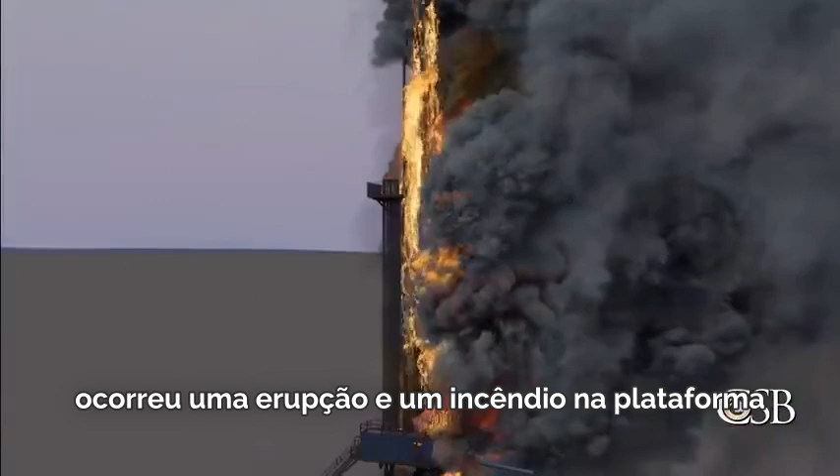In order to change a drill bit, crew members removed the drill pipe from the well. Approximately 3.5 hours later, a blowout and rig fire occurred, killing 5 workers.

Industry best practices recommend having 2 protective barriers in place at all times during drilling operations. But our investigation into the incident at the Pryor Trust well found that both of those barriers failed. The safety management system utilized at the well was simply not effective, and the result was a catastrophic blowout and fire.

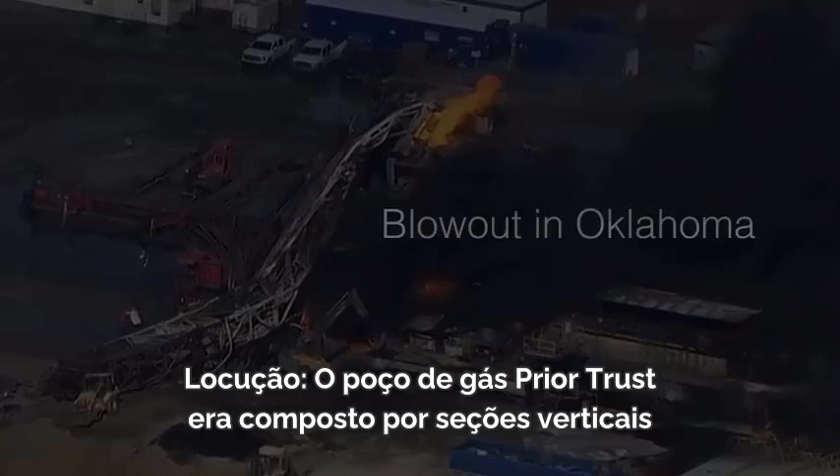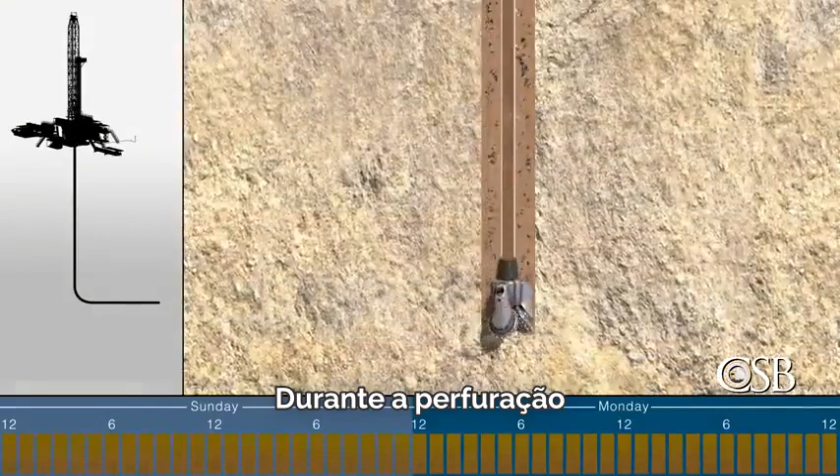The Pryor Trust gas well was comprised of vertical and horizontal sections being drilled to reach underground natural gas in the Woodford geological formation. During drilling, a diesel oil-based liquid called mud is pumped down through the drill pipe and back up through the area of the well outside of the drill pipe, called the annulus.

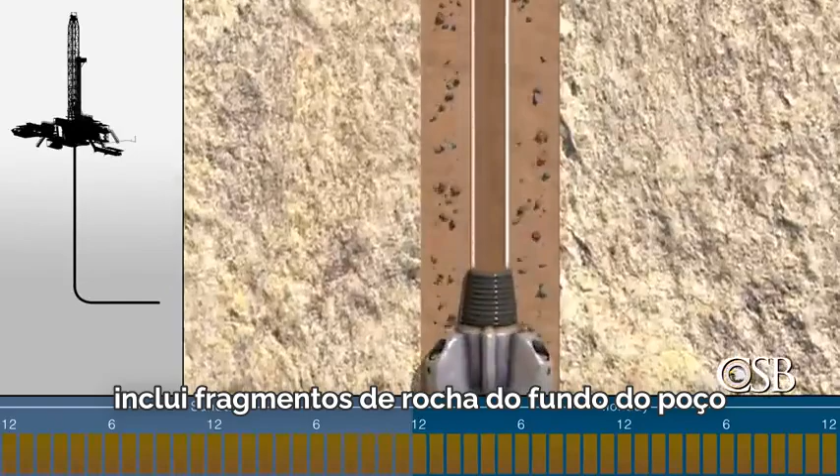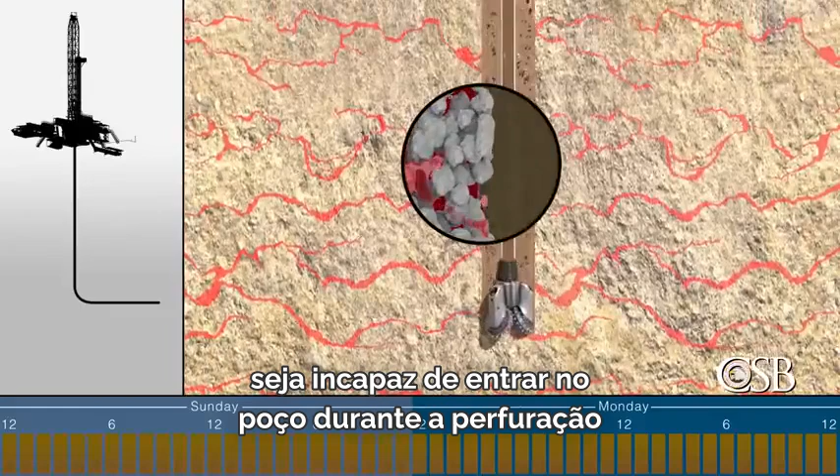When mud returns to the surface, it includes rock cuttings from the bottom of the well. Mud, however, has another important function. It is designed to add pressure to the well so that gas within the exposed geological formation is unable to enter the well during drilling. If that happens, and the gas is not detected, it can lead to a dangerous blowout.

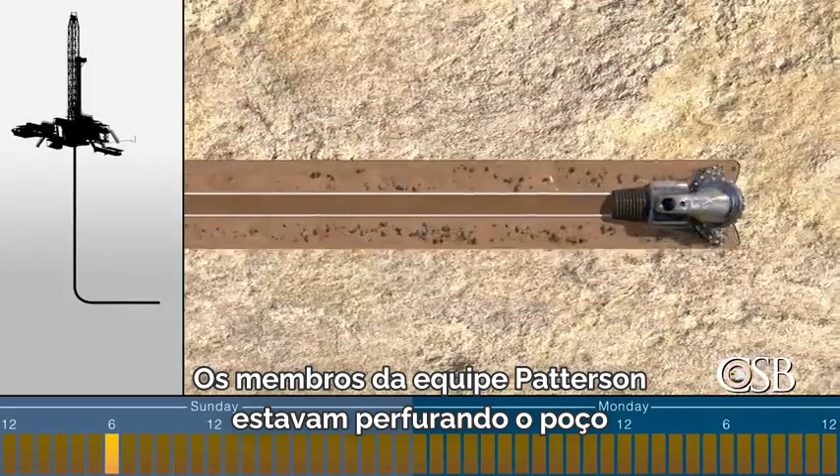On January 21, 2018, Patterson crew members had been drilling the well for 10 days under the supervision of 2 contracted representatives from Red Mountain. They were drilling the horizontal section of the well.

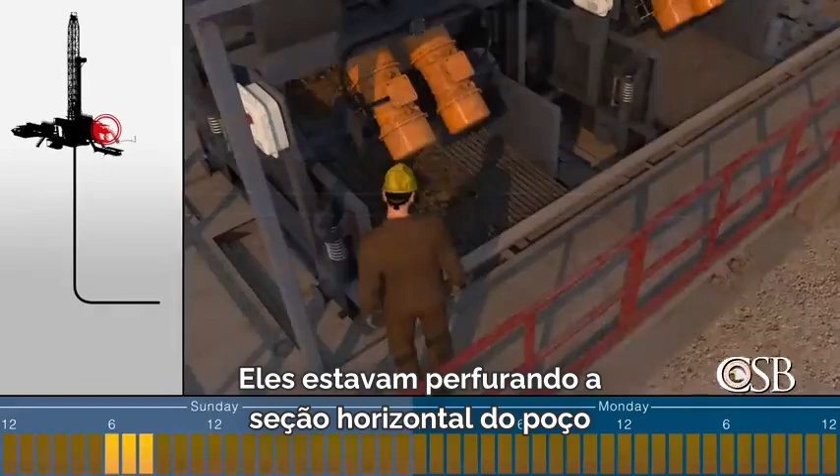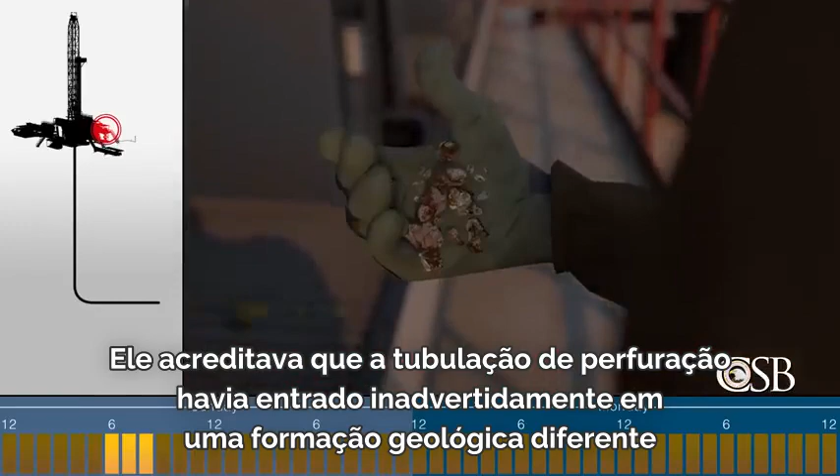That morning, a crew member called a mud logger studied the rocks returning to the surface and found they were different than expected. He believed the drill pipe had inadvertently entered a different geological formation where Red Mountain did not intend to drill. Shortly after, gas started to escape from mud returning to the surface.

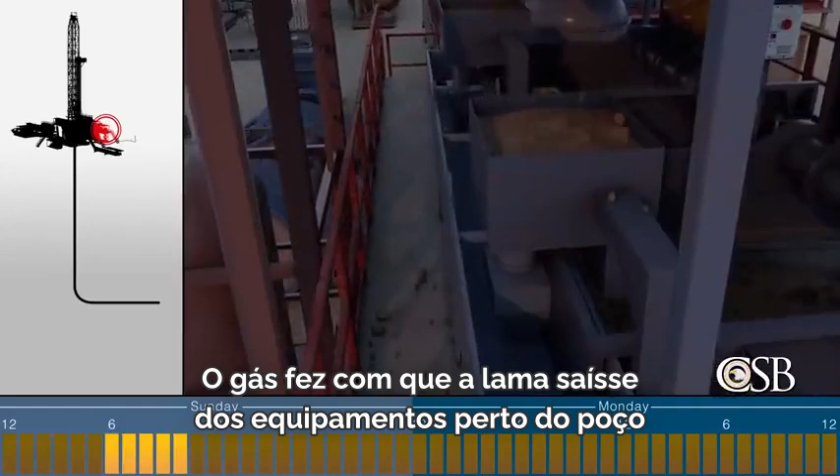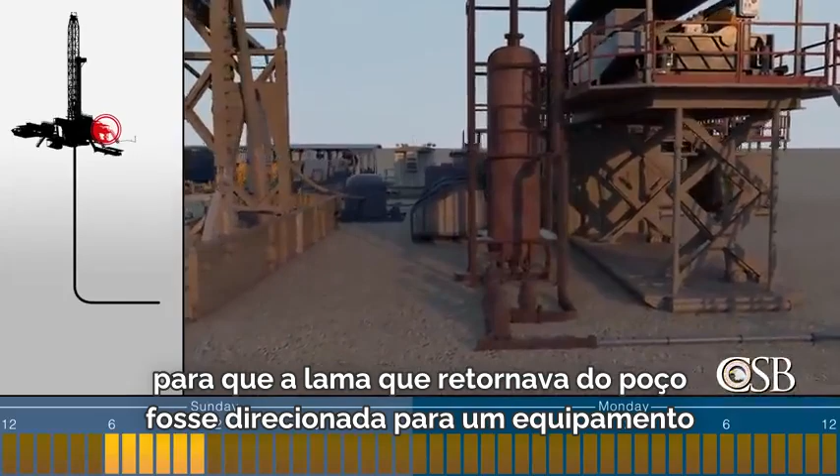The gas caused mud to spit out of equipment near the well and cover a portion of the rig. Around 11 a.m., the drilling crew adjusted piping so that mud returning from the well was routed to a piece of equipment called a mud gas separator that removed the gas from the mud. The separated gas was then routed to a flare to safely burn it.

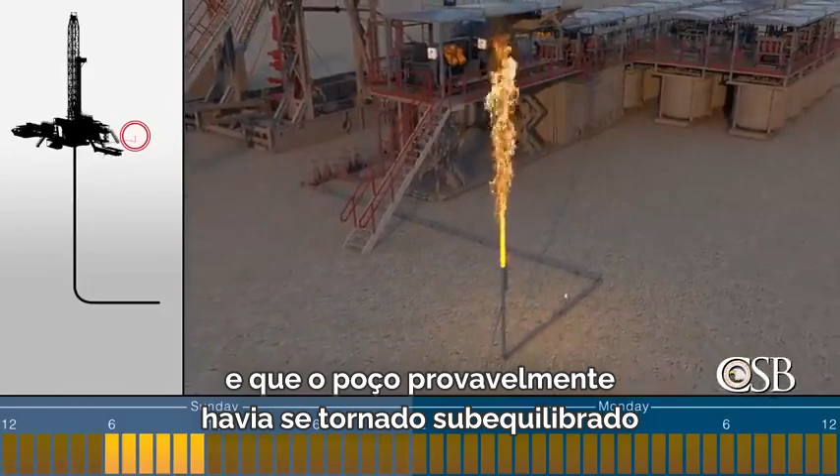The size of the flare indicated that there was a significant amount of gas in the mud and that the well had likely become underbalanced, meaning that pressure from the mud was not keeping gas out of the well as intended. The crew continued drilling underbalanced until 3:30 p.m., when they stopped because the drill bit had become worn and needed to be replaced.

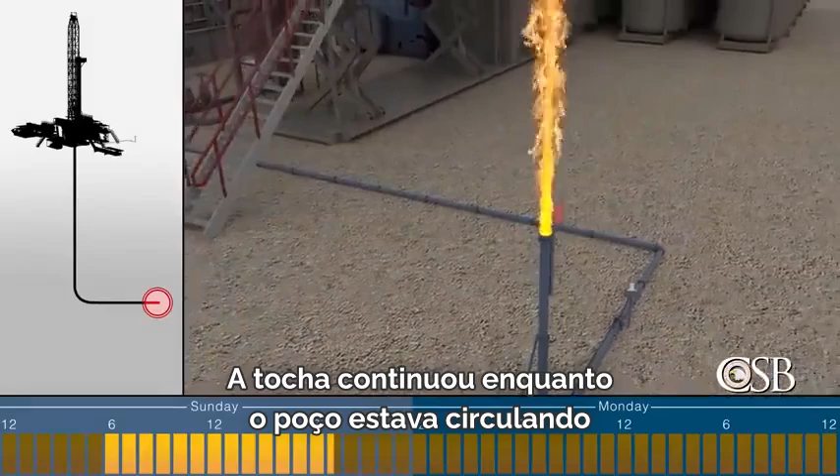The crew first circulated the well for 3 hours by pumping mud down the drill pipe and up the annulus. The flare continued while the well was circulating, an indication that the well remained underbalanced.

While circulating, the Red Mountain representatives discussed how to remove the drill pipe from the well in order to replace the drill bit. The process to remove a drill pipe is called tripping. During any tripping operation, mud is pumped into the well to replace the volume of drill pipe being removed, which prevents gas from flowing into the well.

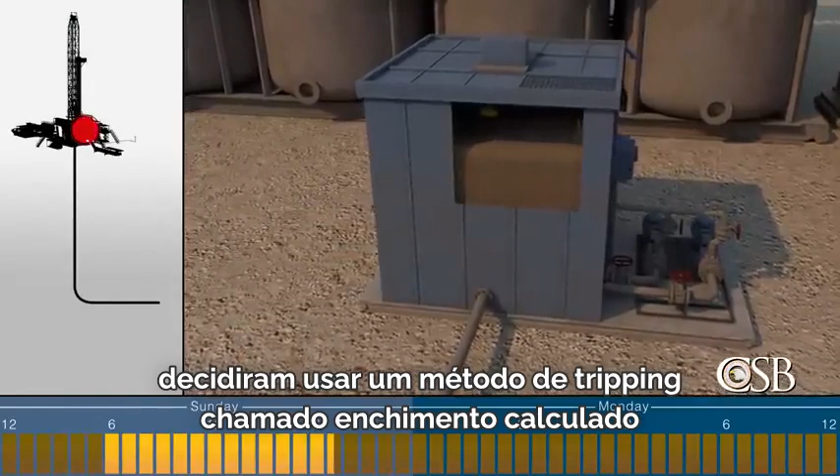In this case, the Red Mountain representatives decided to use a tripping method called calculated fill, which involved periodically pumping a calculated amount of mud into the well as the drill pipe was removed. They believed this method would keep the well contained if gas entered during the operation. But it was not a standard tripping method during normal drilling, so no one on the Patterson crew had performed it before, and they had no written procedure.

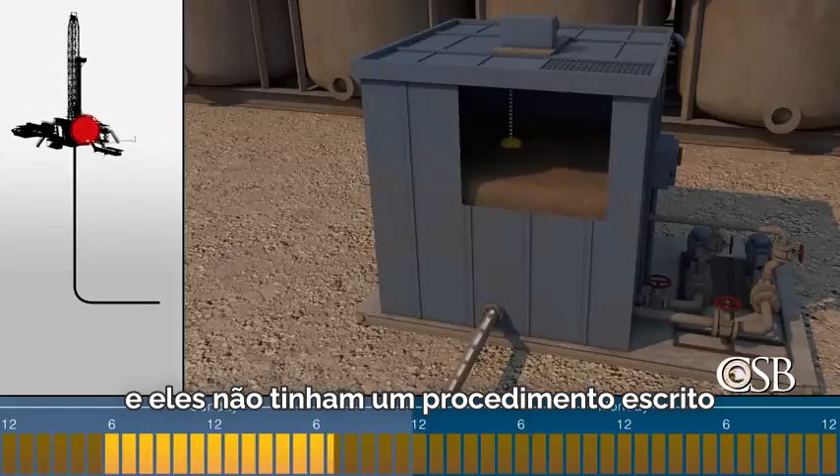The crew started removing the drill pipe at 6:47 p.m. The CSB found that while tripping the drill pipe from the horizontal section of the well, not enough mud was pumped and gas entered the well.

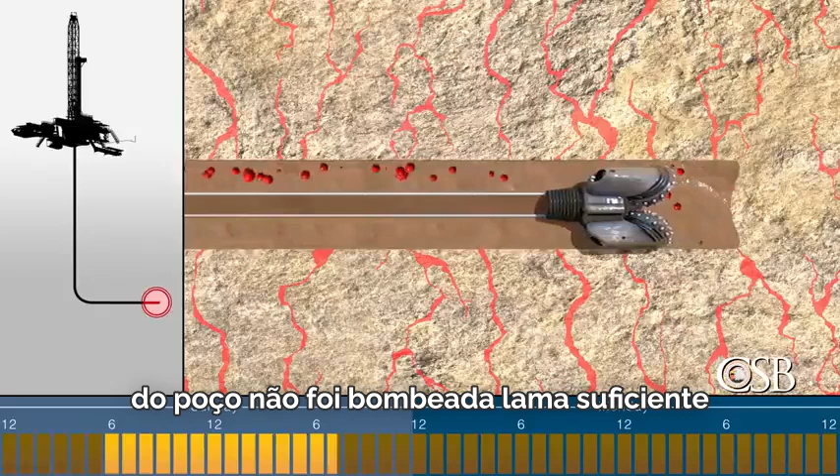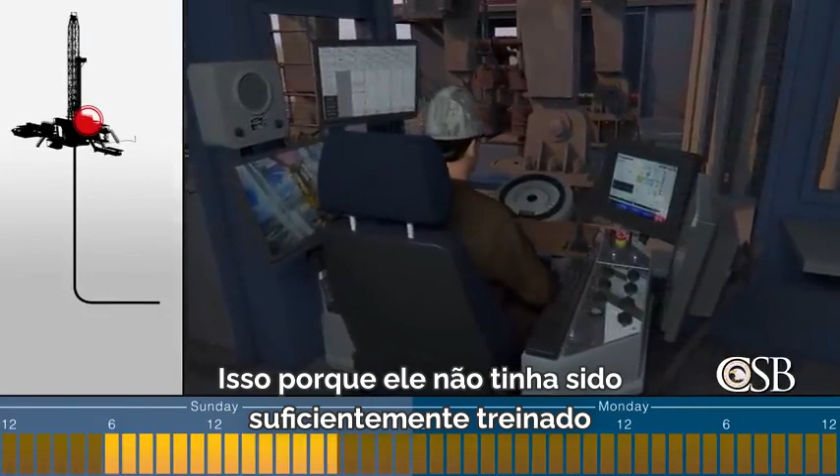The driller, who was controlling the operation from inside a building on the rig called the driller's cabin, did not see the discrepancy. That is because he had not been sufficiently trained on a new electronic version of a trip sheet, which is a form used to monitor and calculate whether a well is taking the proper amount of mud during tripping.

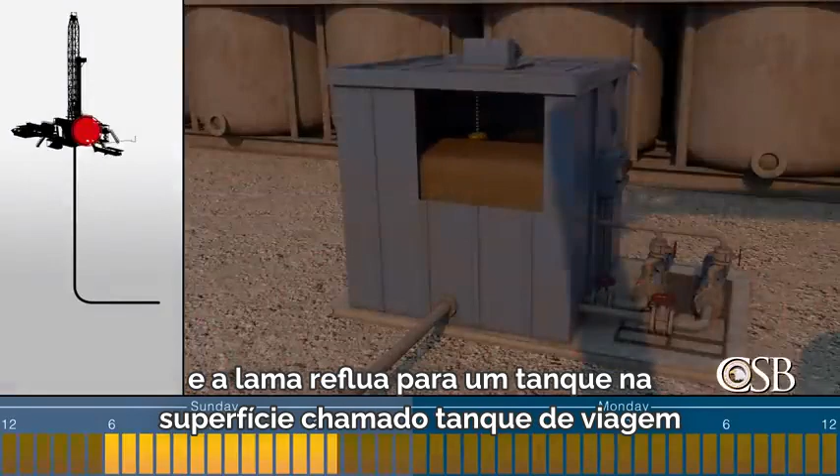As a result, he was unable to see that a significant amount of gas continued to enter or expand within the well, causing pressure in the well to increase and mud to backflow into a tank at the surface called the trip tank. In fact, pressure at the surface of the well had increased so much that the centrifugal pump the crew was using was no longer able to pump mud against the pressure of the well.

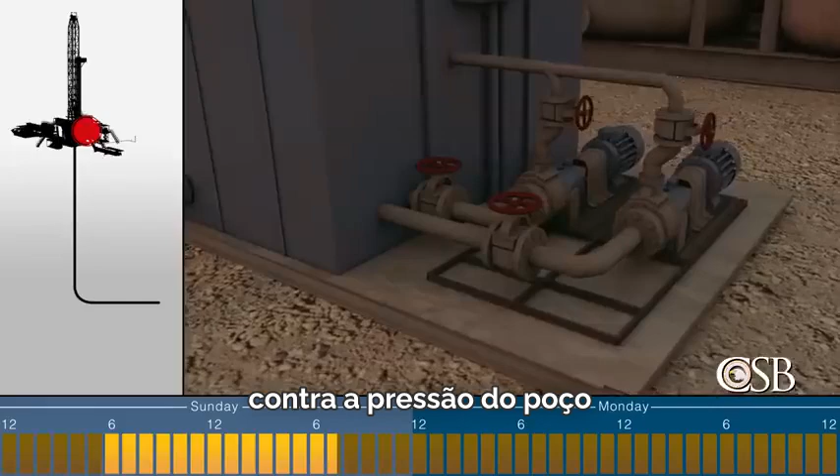Red Mountain's representatives decided to switch to higher pressure pumps, called mud pumps, to try to force mud into the well. They believed that the pressure applied by the new pumps would push any gas out of the well.

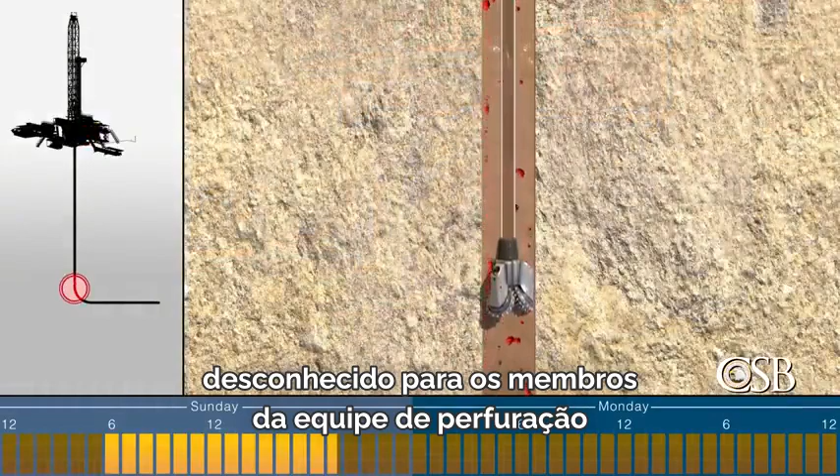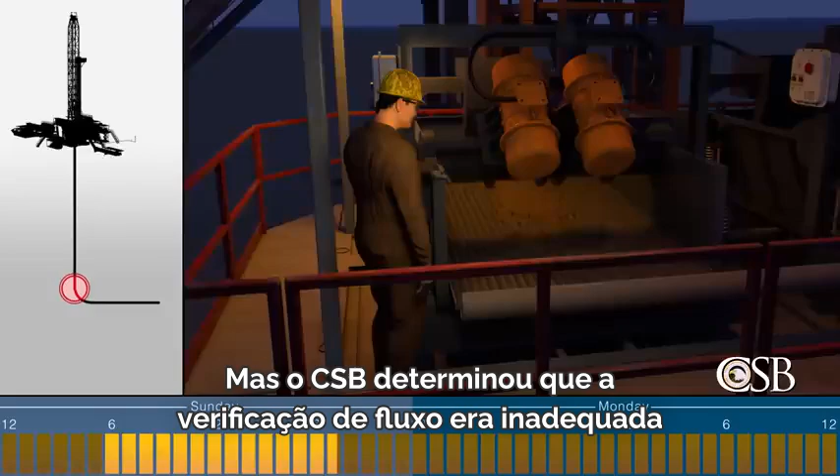But by the time the drill bit reached the top of the curve in the well, the CSB found that, unknown to drilling crew members, 20 barrels of gas had entered or expanded within the well. At that time, the drilling crew performed a 45-second flow check to see if gas was flowing in the well. The crew did not observe any flow of gas and believed the well to be stable, but the CSB determined that the flow check was inadequate.

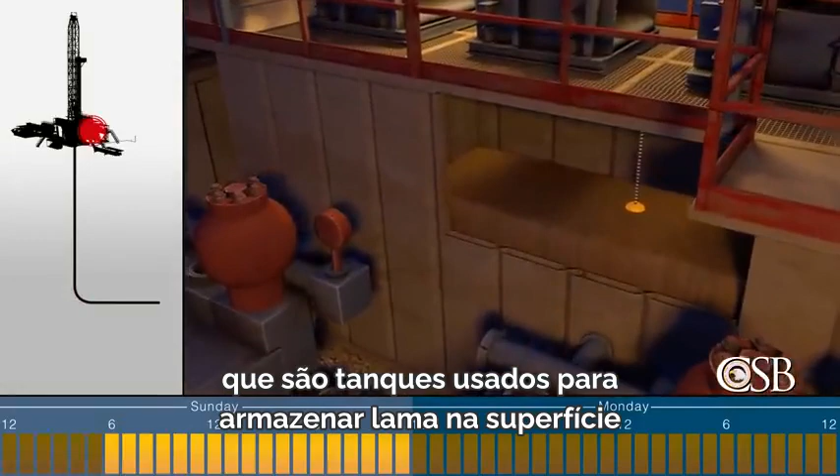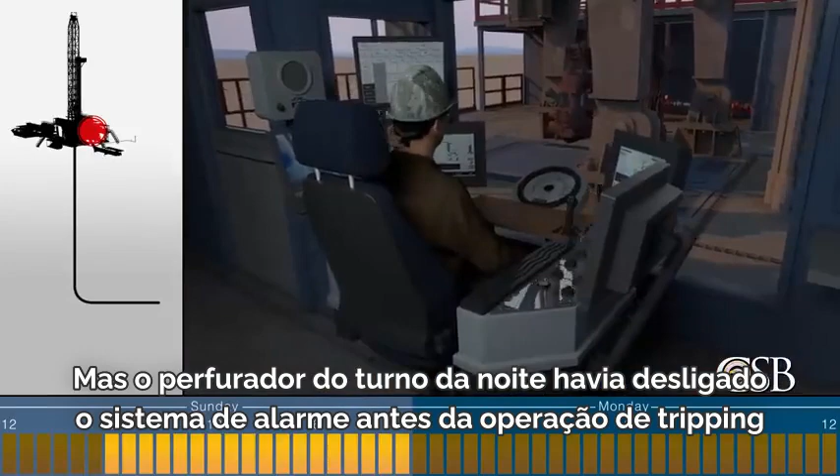At 11 p.m., the drilling crew again circulated the well. While circulating, the rig's mud pits, which are tanks used to hold mud at the surface and are equipped with level sensors, gained 14 barrels of mud when they should have remained stable. This meant that the well gained approximately 14 barrels of gas, which caused the mud to escape at the surface. But the night shift driller had turned off the alarm system before the tripping operation, and no alarm sounded, so the large gain went unnoticed.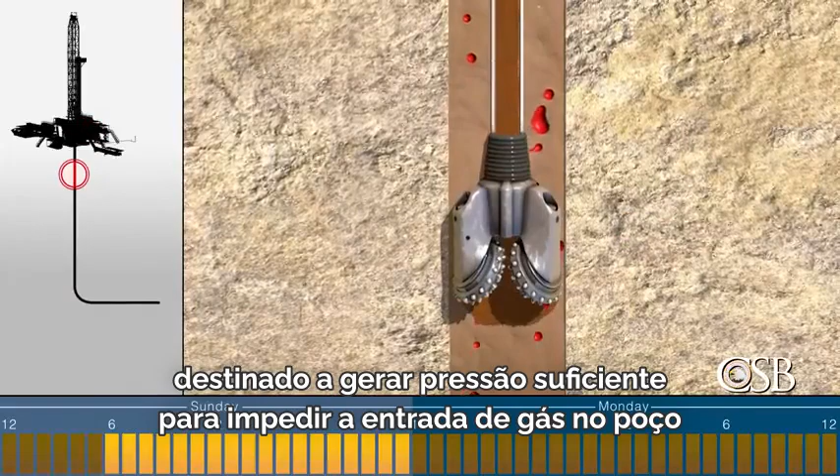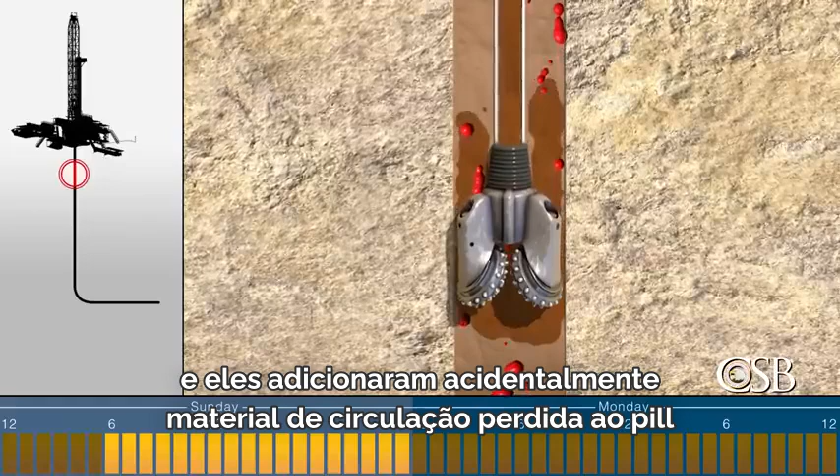Red Mountain's representatives then decided to pump a weighted volume of mud, called a pill, into the well, meant to generate enough pressure to prevent gas from entering the well. But a Patterson drilling crew member misheard Red Mountain's instructions over the radio, and they accidentally added lost circulation material to the pill. This material is designed to clog breaches in the well and is not intended to be in weighted pills. Although the mistake was discovered, the pill containing the lost circulation material was pumped down to the bottom of the drill pipe, clogging it.

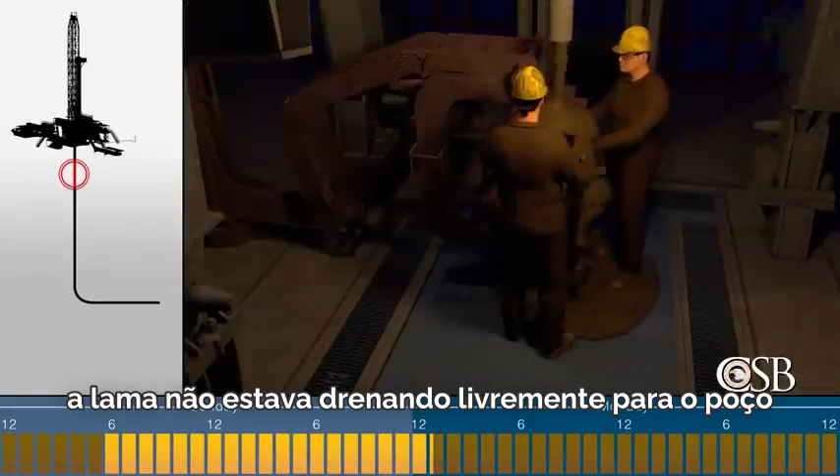By 1:12 a.m. on January 22nd, the crew started to remove the drill pipe from the vertical section of the well, this time using the typical industry tripping method called continuous fill, where mud is pumped continuously into the well as the drill pipe is removed. But because the drill pipe was clogged, the mud was not freely draining into the well. The crew attempted to pump a weighted slug of mud into the drill pipe to push the clogged mud out, but this was not successful.

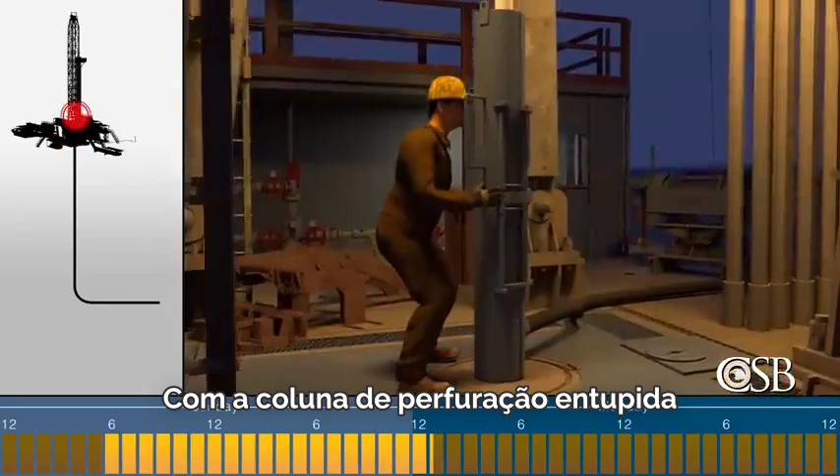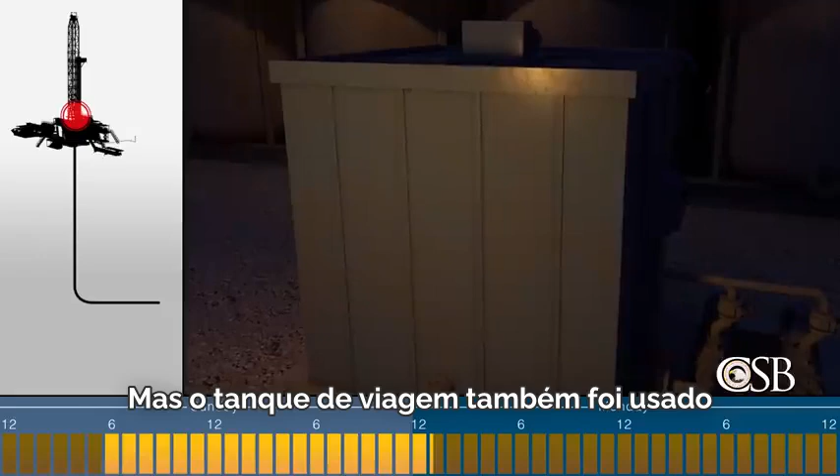With the drill pipe plugged, the drilling crew had to trip wet, meaning mud was in the pipe sections being removed at the surface. The drilling crew used what is known as a mud bucket to collect the mud from the drill pipe, which they drained into the trip tank. But the trip tank was also used to pump mud into the well during tripping, so the trip tank volume started to fluctuate as mud was pumped out to the well and drained in from the drill pipe.

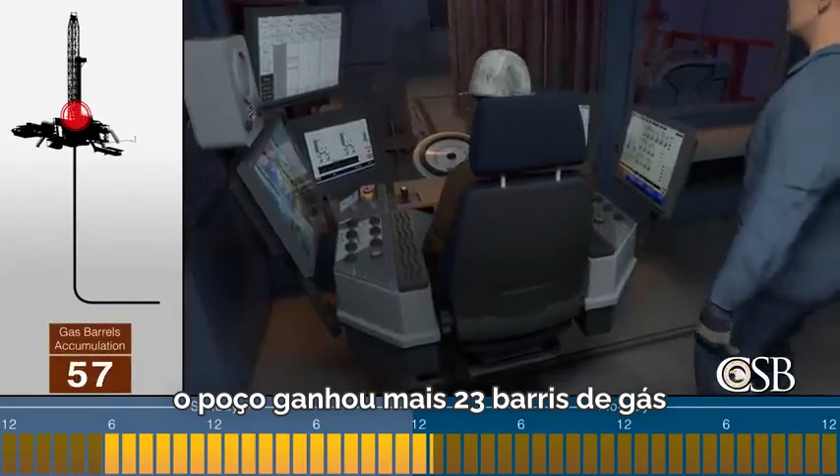The fluctuations confused crew members, and they did not realize that while the drill pipe was removed from the vertical section, the well gained another 23 barrels of gas. When the bottom hole assembly, which is equipment at the end of the drill pipe that includes the drill bit, was near the top of the well, the crew finally removed the plugged part of the drill pipe. For the next hour, they tried to clear the clog.

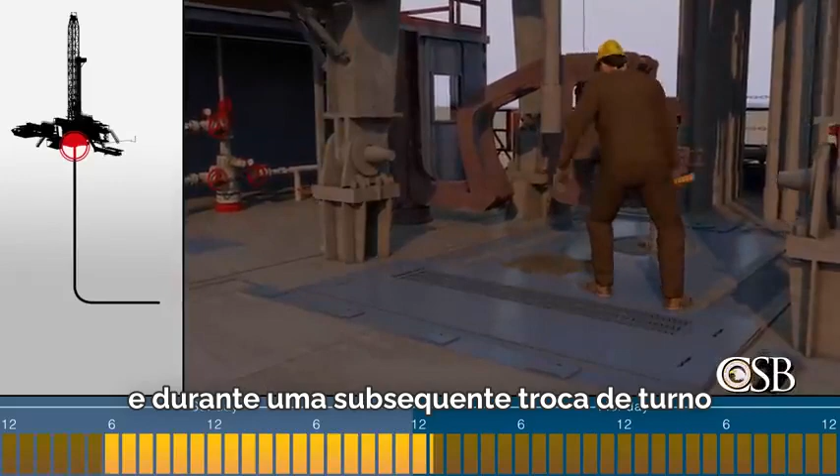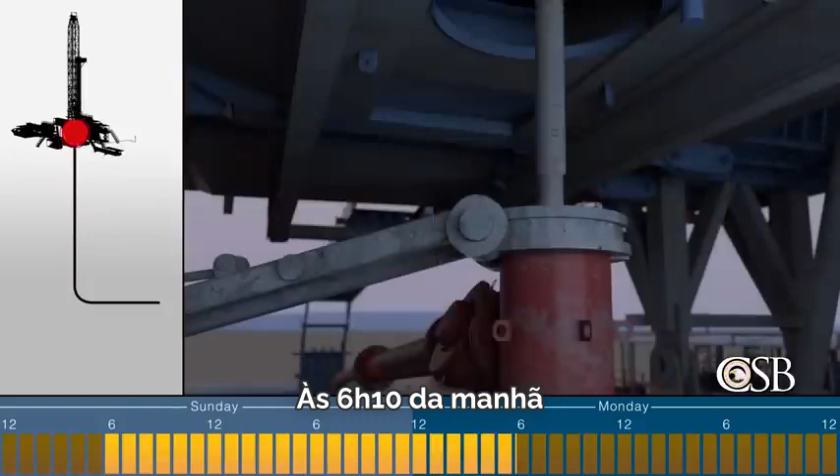But at that time, and during a subsequent shift change, the well was still flowing, gaining another 31 barrels of gas and pushing more mud into the trip tank. No one saw the gain. At 6:10 a.m., the crew lifted the bottom hole assembly out of the well and closed the blind rams on the blowout preventer.

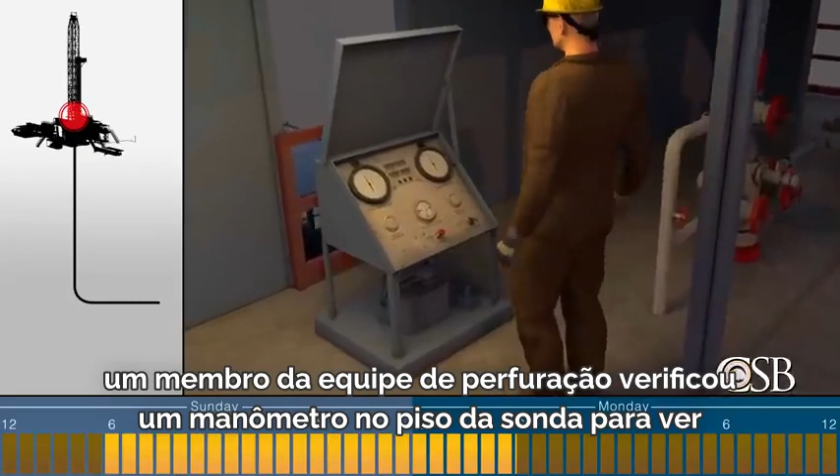They prepared a new bottom hole assembly for testing. When it was ready, a drilling crew member checked a pressure gauge on the rig floor to see if it showed pressure in the well, a safety precaution used before opening the blowout preventer. The pressure gauge showed no pressure.

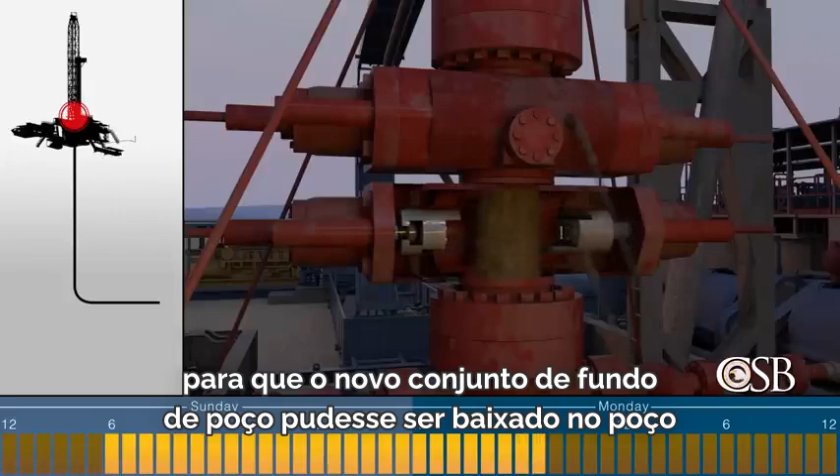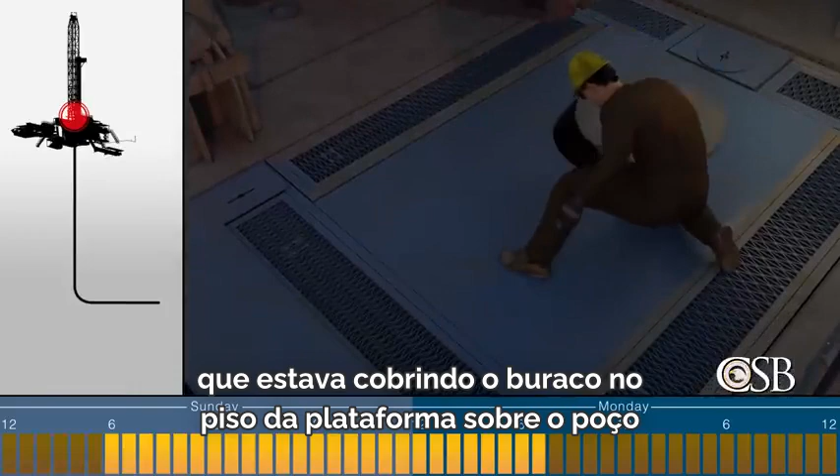But at 7:57 a.m., when the blind rams were reopened so the new bottom hole assembly could be lowered into the well, 5 barrels of mud surged to the mud pits. At that time, a crew member pulled away the steel plate that had been covering the hole in the rig floor over the well. He waved over another worker who saw mud bubbling in the well, a sign that there was a significant amount of gas in the mud. That worker later told the CSB that he does not know if the mud bubbling was communicated to the driller.

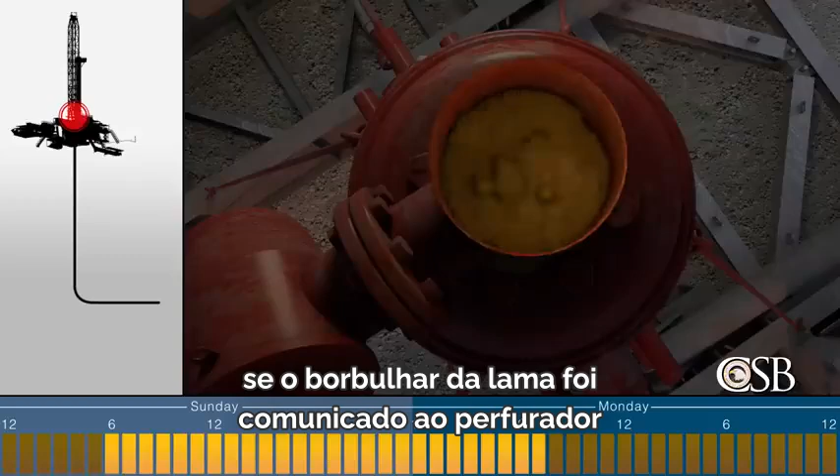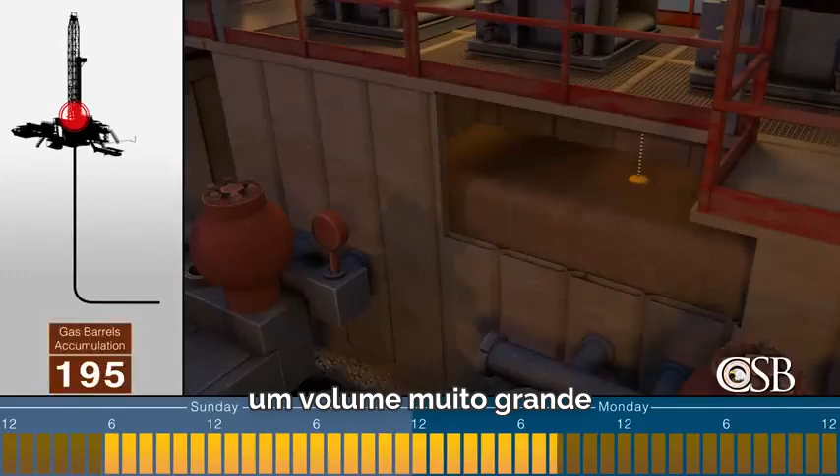Between 7:57 a.m. and 8:35 a.m., while the drilling crew was testing the new bottom hole assembly, the mud pits gained another 102 barrels of mud, a very large volume. This significant gain likely displayed on the driller's data screen, but the day shift driller also chose to turn off the alarm system, and it is unknown if the driller saw this dangerous gain.

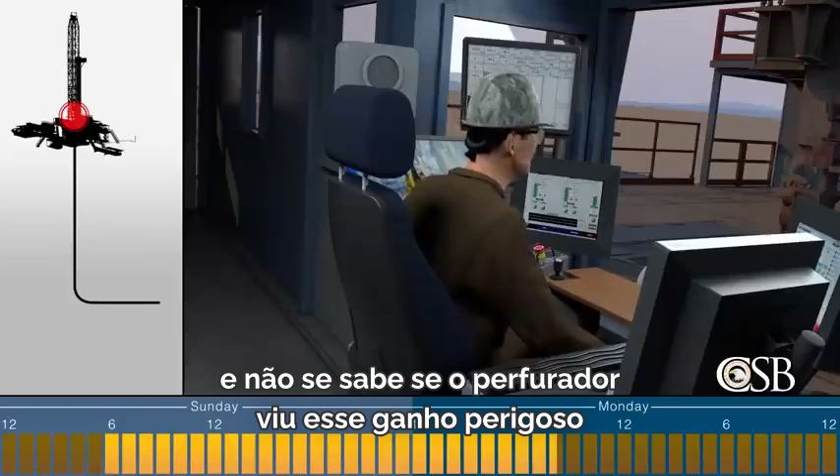At 8:35, with testing complete, the bottom hole assembly was removed from the well, and the mud pits gained another 12 barrels of mud, for a total influx of 207 barrels into the well from the start of the tripping operation. A crew member saw mud flowing up out of the open blowout preventer stack, shooting up steadily and getting closer to the rig floor. The crew member told the driller, and the driller responded that he was going to close the blind rams, but he never made it. Seconds later, mud blew upwards out of the well in what is known as a blowout.

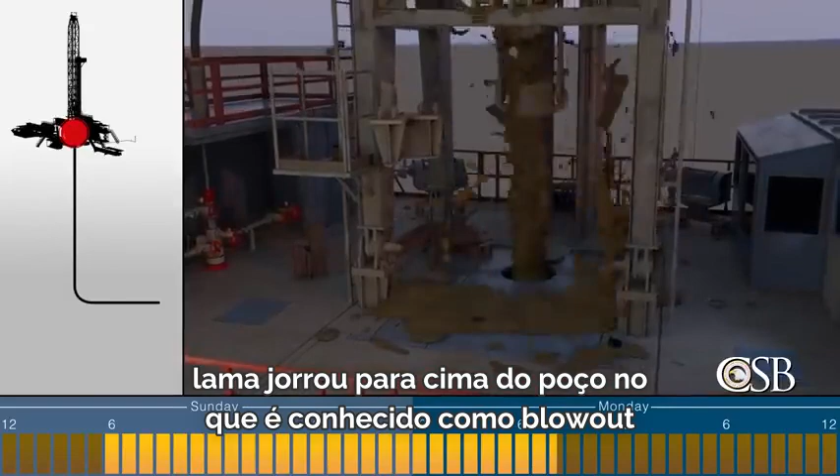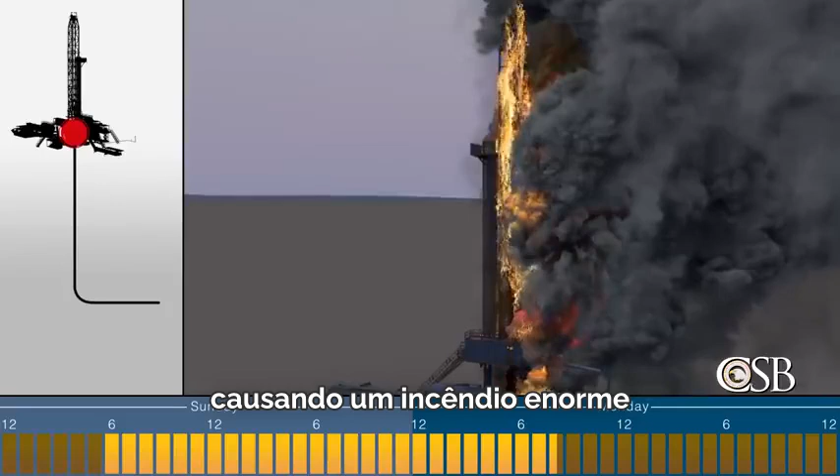Two workers on the rig floor ran into the driller's cabin, where three other workers were already located. The gas and mud then ignited, causing a massive fire. All five people in the driller's cabin were killed. The blowout continued for hours until a well control services company was able to shut in the well around 4 p.m.

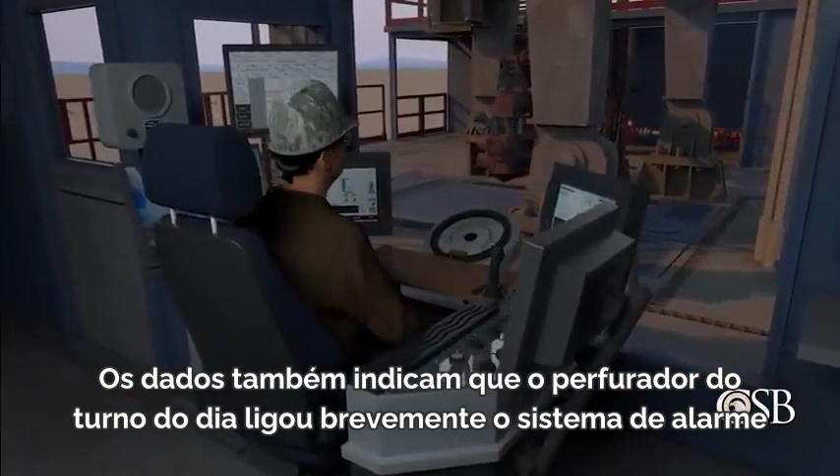During its investigation, the CSB found data indicating that on the evening prior to the blowout, the night shift driller turned off the entire alarm system. Data also indicates that the day shift driller briefly turned on the alarm system, but then quickly turned it off again on the day of the incident. Other than that short period, the alarm system was off for 14 hours, leading to the blowout.

We were not able to conclusively determine why the drillers turned the alarm system off. A possible reason is that the alarms were perceived as a nuisance or an annoyance. In fact, we found that had the alarm system been on, most of the alarms that would have activated during the 14 hours leading up to the incident likely would have been irrelevant to detecting the problems in the well.

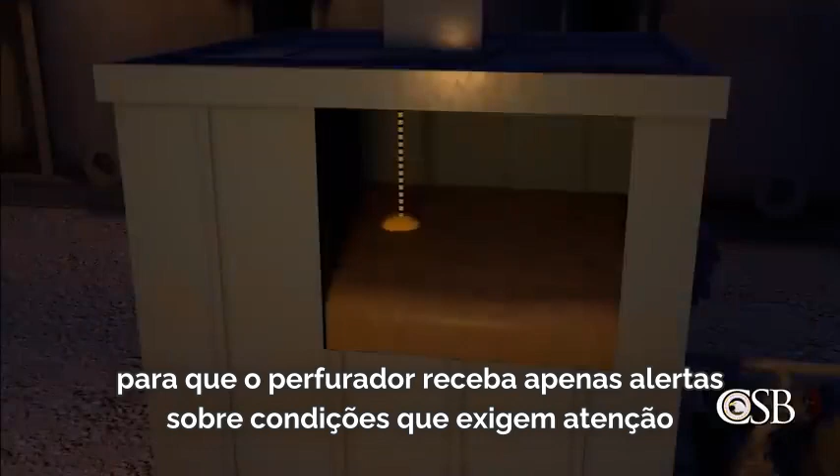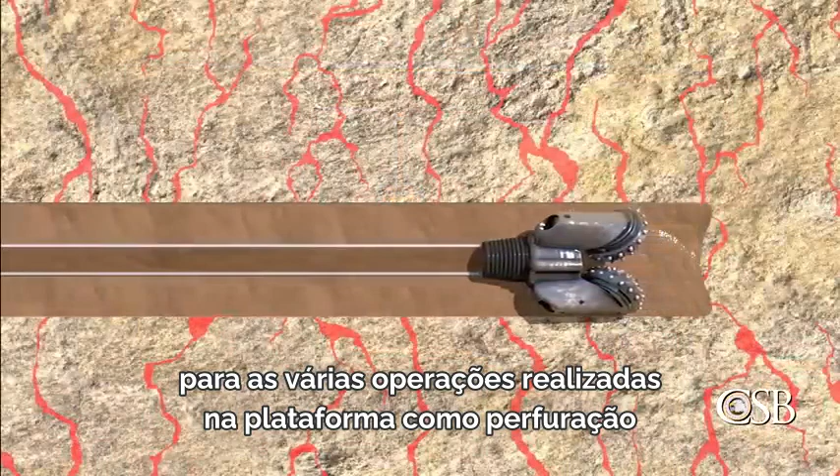For an alarm system to be effective, it must be configured so that the driller only receives alerts to conditions that require attention. But the CSB found that Patterson did not develop guidance to help drillers set the alarm system for the various operations performed on the rig, such as drilling, tripping, and circulating. Instead, to manage the alarm rate, both drillers apparently elected to simply turn off the alarm system.

We concluded that what's called a state-based alarm strategy is one way to solve this issue. For example, on a drilling rig, there could be different active alarms for each operation, such as drilling, tripping, and circulating, so that alarms critical to a certain operation do not become a nuisance when operating in a different state where those alarms are not needed.

Although there is a large body of guidance and recommendations on the design of alarm systems for hazardous operations, none are specifically targeted for the drilling industry. As a result, the CSB made a recommendation to the American Petroleum Institute to develop a standard on alarm management, specifically for the drilling industry, that addresses drilling's unique dynamic environment and provides guidance on implementing a state-based alarm system for different operating modes.

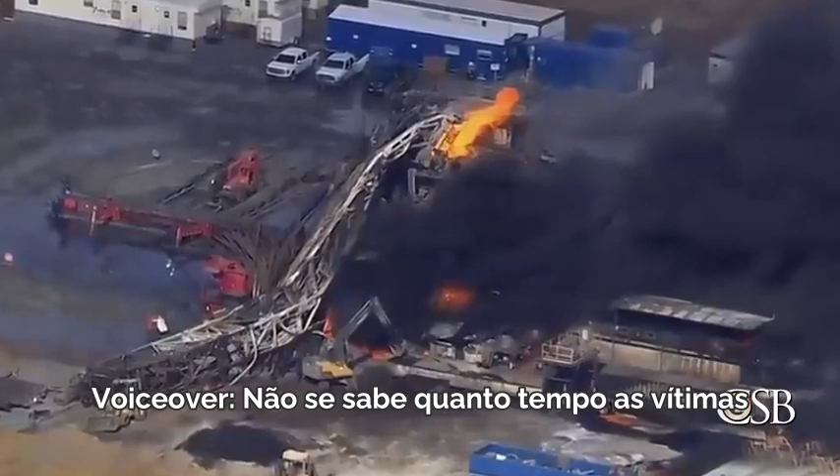When the blowout started, two crew members on the rig floor ran inside the driller's cabin. Three other crew members were already in the driller's cabin, and all five workers were killed. It is unknown how long the victims remained alive inside the cabin, but they had no viable escape routes. There were two exit doors from the driller's cabin, but both were blocked by flames after the gas and mud ignited.

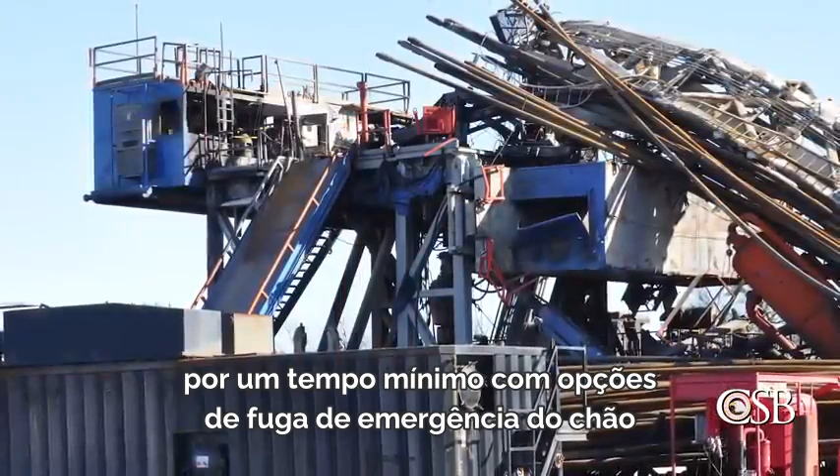The CSB concluded that had the fire rating of the driller's cabin been ensured for a minimum time, with emergency escape options from the floor or from the back wall, there could have been a better chance for the workers inside to have survived this incident.

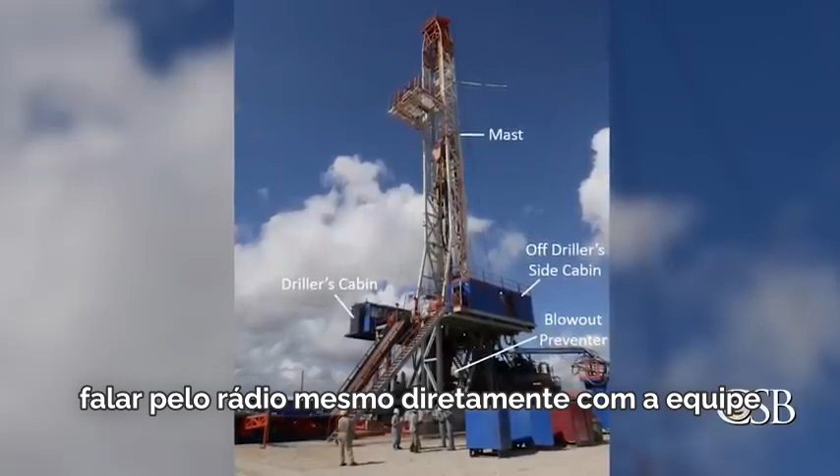Stan Christman is a drilling expert who consulted with the CSB on the Pryor Trust investigation. On a drilling rig, the operations are controlled from the driller's cabin by the key man, the driller, and he has a crew that works for him on the rig floor. The driller's cabin is located right next to the rig floor. He can see, talk over radio, even directly to the crew, and get things done.

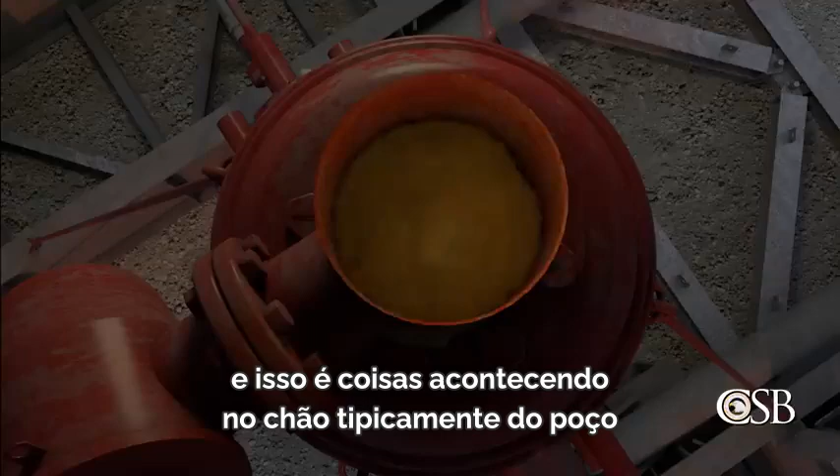Having the driller's cabin near the rig floor puts it closer to the hazards, and that is things happening on the floor, typically from the well. These hazards are things we could probably think further about. How do we improve the reliability and safety of these cabins for these unusual events?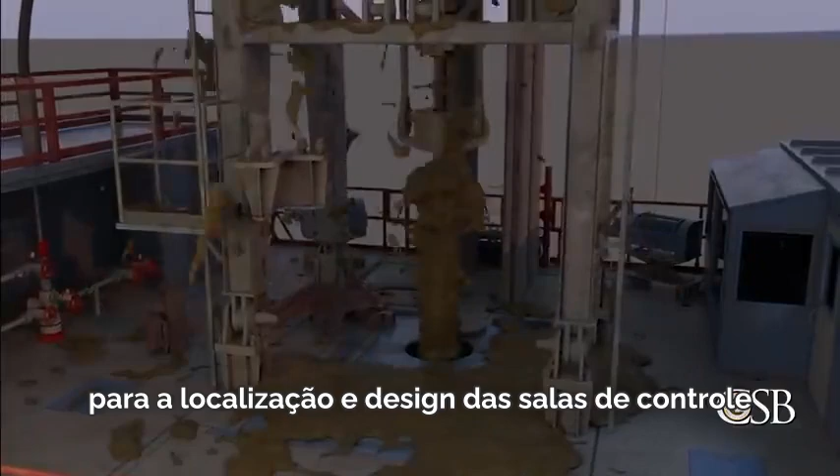Although there are best practices within the chemical industry for the location and design of control rooms, there is no guidance specific to drilling. As a result, the CSB made a recommendation to the American Petroleum Institute to develop guidance addressing the protection of onshore rig workers from fire and explosion hazards in the event of a blowout. The guidance will specifically address the design and location of the driller's cabin and establish minimum required evacuation methods from various locations on the rig.

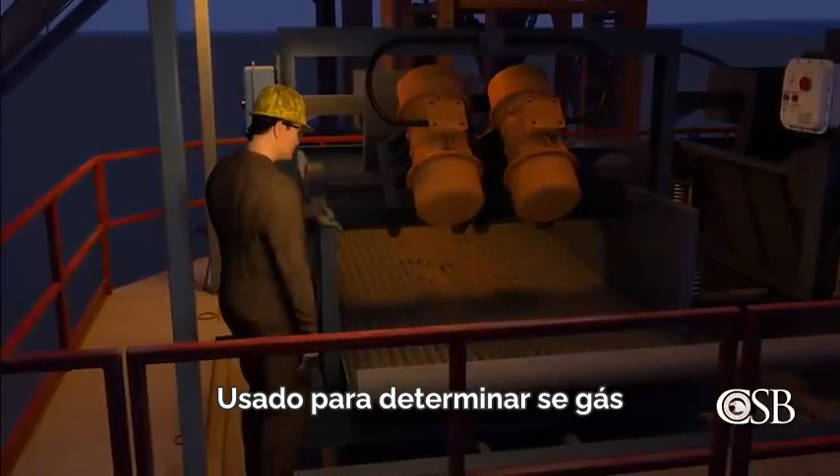Flow checks are a safety-critical operation used to determine if gas or other formation fluids have entered a well, which could lead to a blowout.

Patterson policies required flow checks to be performed at various times during the tripping operation. But the CSB found that of the 27 flow checks required by Patterson during the drilling of this well and the previous well, only 2 were performed, and those were inadequate. There was a culture on this rig that accepted the non-performance of flow checks. Performing flow checks during the tripping operation, as required by Patterson, could have identified that the well was flowing and could have prevented the blowout.

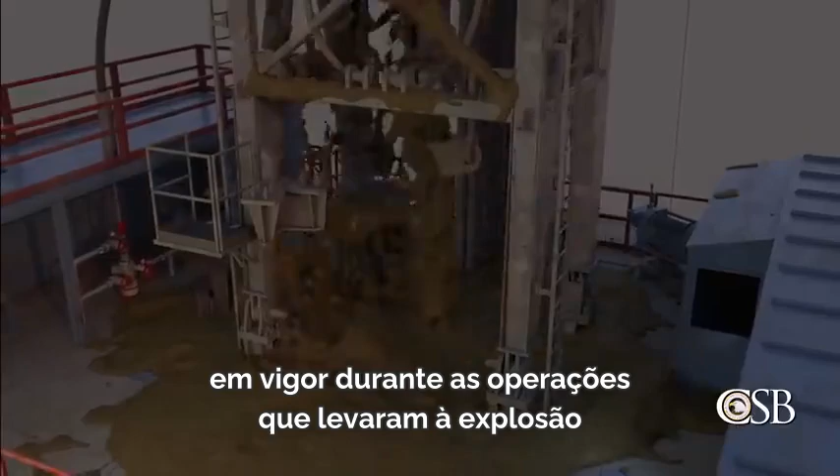The CSB found that the cause of the blowout and rig fire was the failure of both barriers that should have been in place during the operations leading to the blowout. Those two barriers were the primary prevention barrier, hydrostatic pressure produced by drilling mud, and the secondary mitigation barrier, human detection of gas entering the well and activation of the blowout preventer.

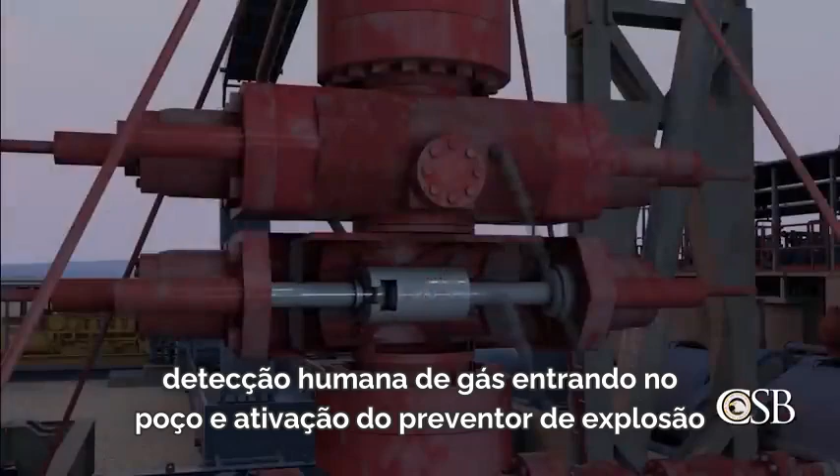When the well became underbalanced on January 21st, the primary protective barrier was lost, but work was not stopped so that the barrier could be reestablished by increasing the weight of mud, and no analysis on the loss of the barrier was performed.

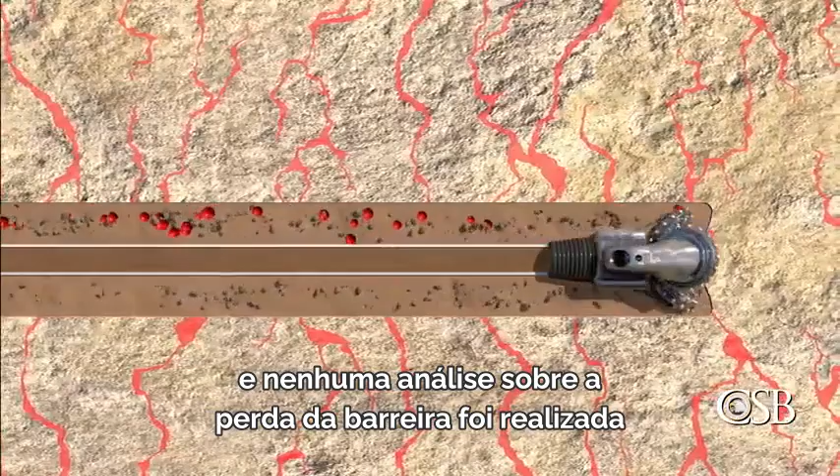We learned that Red Mountain had developed what they called a drilling prognosis, which is a type of well plan, but that plan did not specify what barriers were required or how to identify if a barrier was lost. We found that development of a more comprehensive plan, such as what's known as the Well Construction Interface Document, which is used more widely in offshore drilling, was not required.

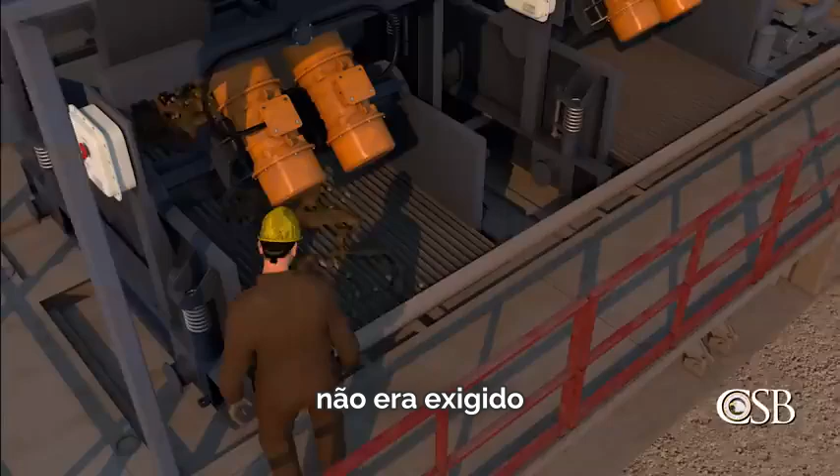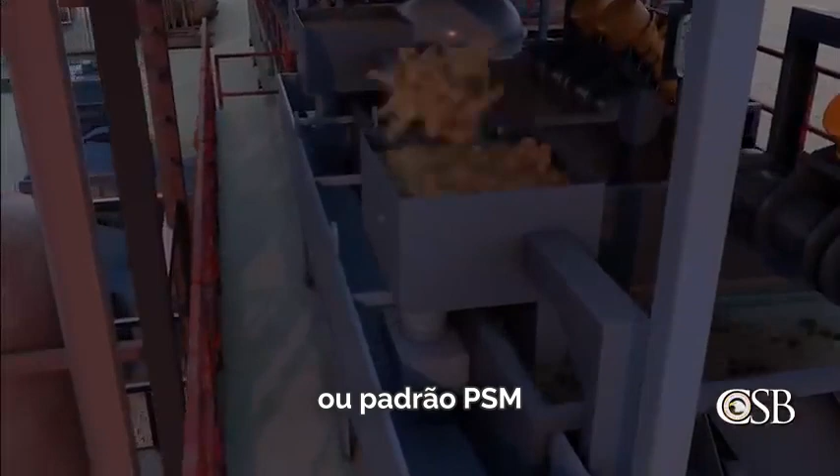In fact, there are minimal federal regulations governing the safety of onshore oil and gas drilling operations. The Occupational Safety and Health Administration's Process Safety Management, or PSM standard, which would require a hazard analysis of the operation, does not apply to drilling. No other OSHA standard specifically covers drilling, and no other federal regulatory body oversees the safety of onshore drilling operations.

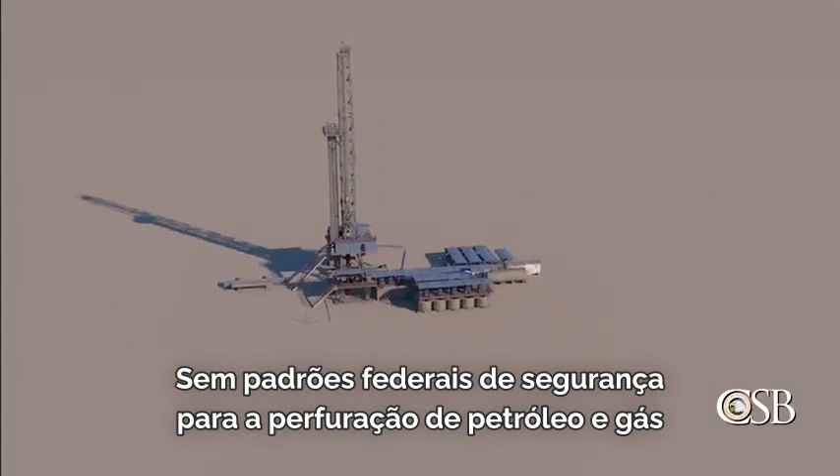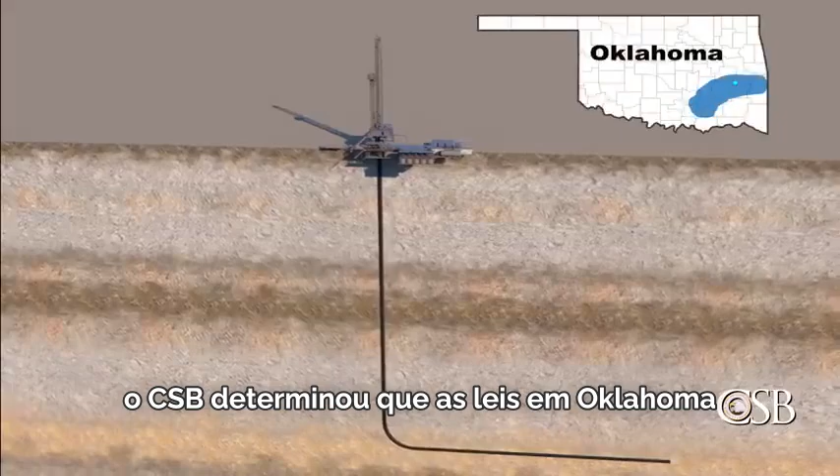With no federal safety standards for oil and gas, drilling companies are governed by a patchwork of individual state laws. During its investigation, the CSB determined that the laws in Oklahoma, where the incident occurred, are not focused on safety, and instead stress maximizing production and eliminating the loss of hydrocarbons.

The CSB believes more focused and specialized regulatory coverage, like the OSHA PSM standard for the chemical industry, is needed to better control the hazards inherent to drilling. With the requirement for a more effective safety management system, drilling companies can avoid incidents in a proactive manner, protecting both their workers and the environment.

As a result, the CSB made recommendations to OSHA to either apply the PSM standard to drilling of oil and gas wells or develop a new standard with a safety management system framework similar to PSM that applies only to the drilling of onshore oil and gas wells.

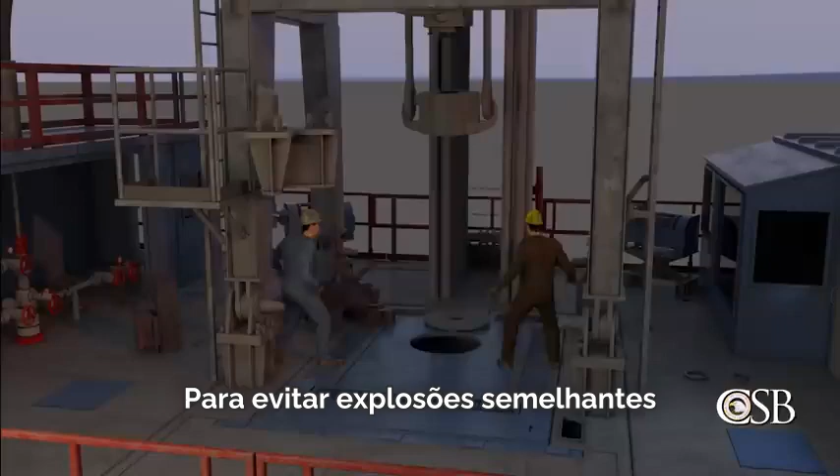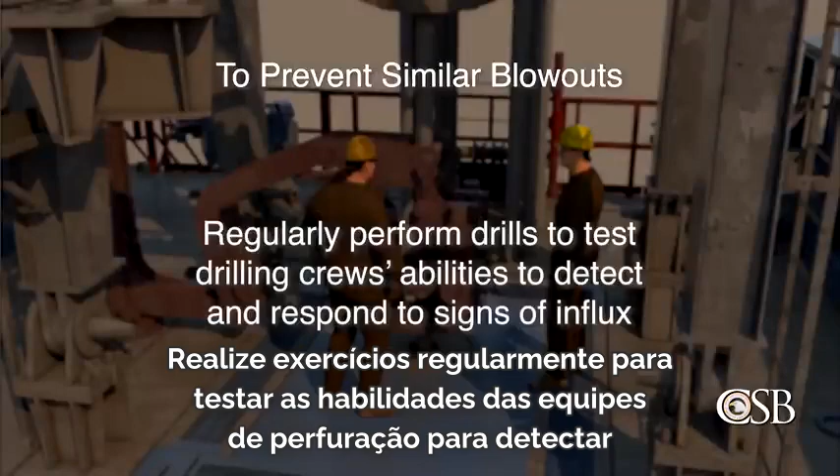To prevent similar blowouts, drilling contractors and operators should develop a well construction interface document, bridging the operators' and drilling contractors' safety systems and providing a barrier plan, including how to monitor barriers and how to respond if a barrier is compromised. Create procedures for operations, including tripping. Design alarm systems so that only the alarms indicating a condition needing drilling crew attention are active. Regularly perform drills to test drilling crews' abilities to detect and respond to signs of influx, and implement an indicators program to monitor and improve policy implementation rates.

The blowout and massive fire at the Pryor Trust well was completely preventable. We hope our findings and recommendations are used by the drilling industry to promote safer operations so that similar tragic incidents can be prevented. Thank you for watching this CSB safety video.